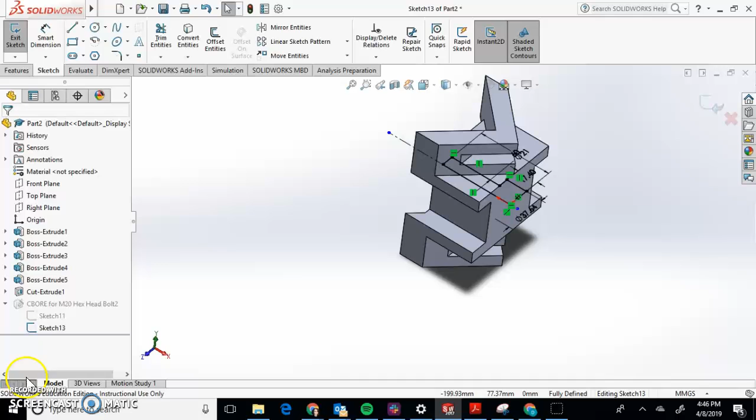Okay, so for this hole, we are going to click on Hole Wizard, and then we're going to go to hole type where we can put in everything. We're just going to do a legacy hole because it's the simplest. You put all your information in really quickly. So, and then we're going to go to counterbore hole.

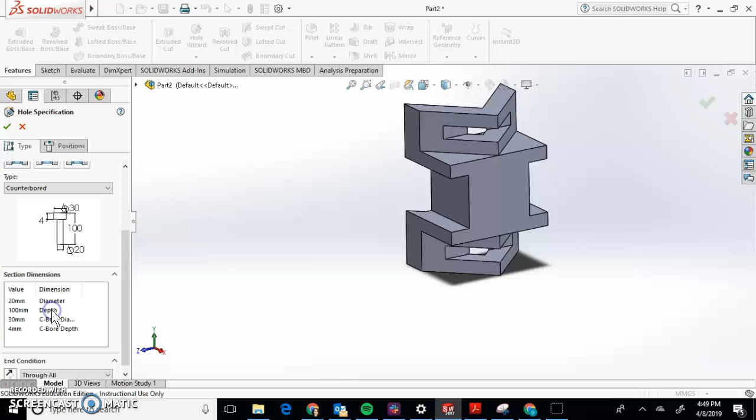So we have, if you look, the top says 30, which is what we want. We want a depth of 4. We want a diameter of 20, which is this part here, and a depth of 100. That comes straight from the guide. So, and that isn't standard. I had put that in earlier, so that's why it is already there. But yeah, so 20, which is this big circle here, 30, which goes from there to there, and then 4 going down.

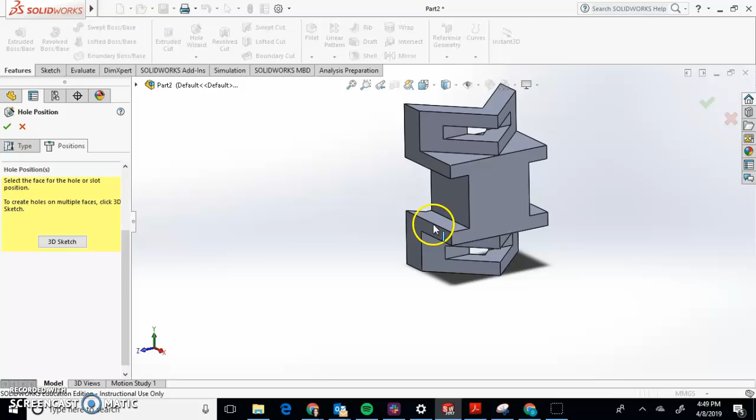And then if you position it, click on the face, click on where you want it in the center, and then there you go. Got your hole.

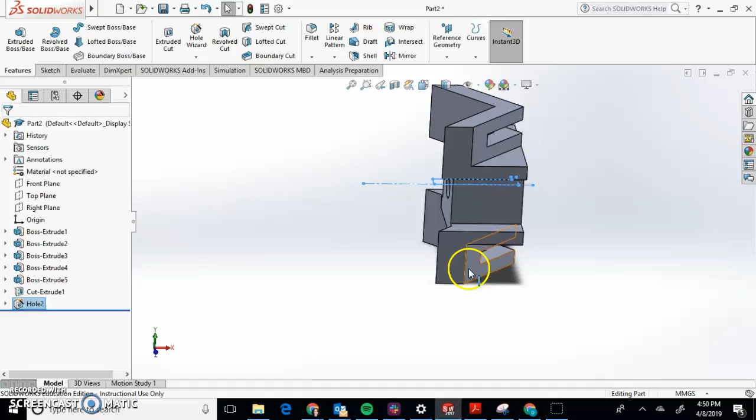And then there is one more little hole. This time we're just going to do a circle. It's 10. It's on the side. It's in the center. Should be simple. Sketch. Sketch here. Control 8.

And then we're just going to do a circle. Kind of draw it in the middle. Smart dimension it. It's 10. And then you want it right in the middle. So it says 25 from here to here. Oops, written 25 there.

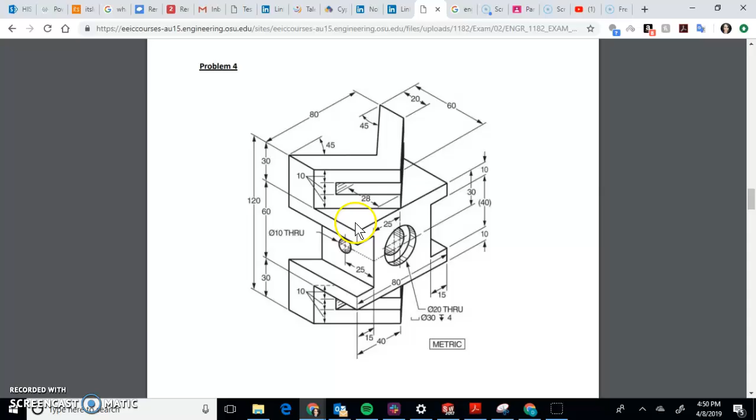And then it's right through the center. So it's 30-ish. Nope, not 30. Yeah, 30 from the top, 30 from this here. So we'll use that dimension.

There you go. And we can go straight into extrude cut. And we're just going to go straight through all. And there it is. That part.

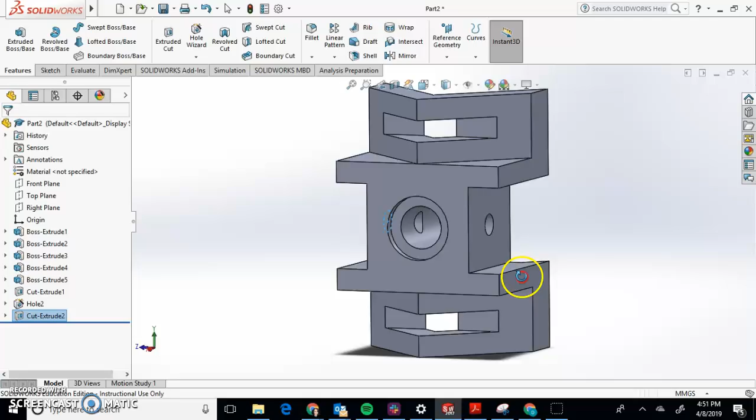That looks so complicated. It is kind of complex, but you just got to break it down. Figure out what is the easiest way you can do it. And then add on to that.